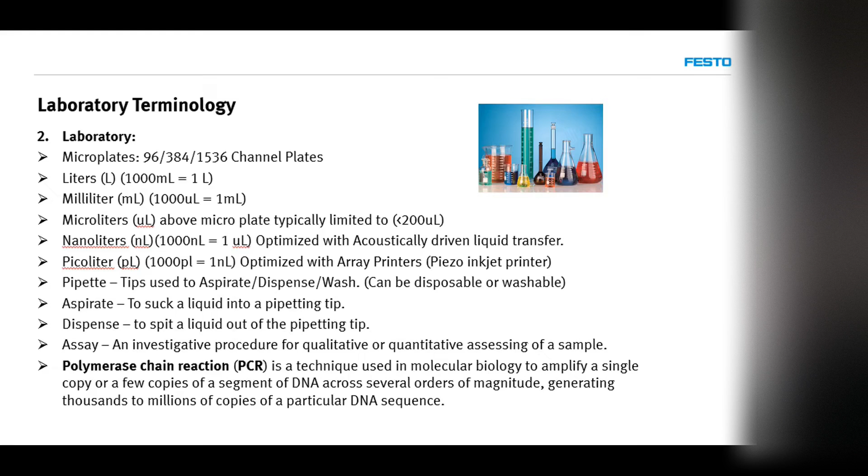The microtiter plates come in a variety of different well capacities, but again the 96, the 384, and the 1536 are most common, and probably the 96 is the most common. So this is what you would see if we're talking about microtiter plates.

Some of the different markets that support the mechanical support and liquid handling support in the laboratory markets: various assays, cell biology, cell culture, clinical diagnostics, down to micro plate dispensing, handlers, readers, sealers, transfer, wash. So there's a lot to do with various mechanical portions for supporting this industry as well.

So if I talk about Festo's methods for fluid handling and their concept and architecture - Festo has a lot of different pumping methods.

There are various pump methods. Festo does a pressure over liquid based method for dispensing, and we have what we call a PGVA. It's a pressure vacuum system. Basically, inside of this unit is an onboard compressor.

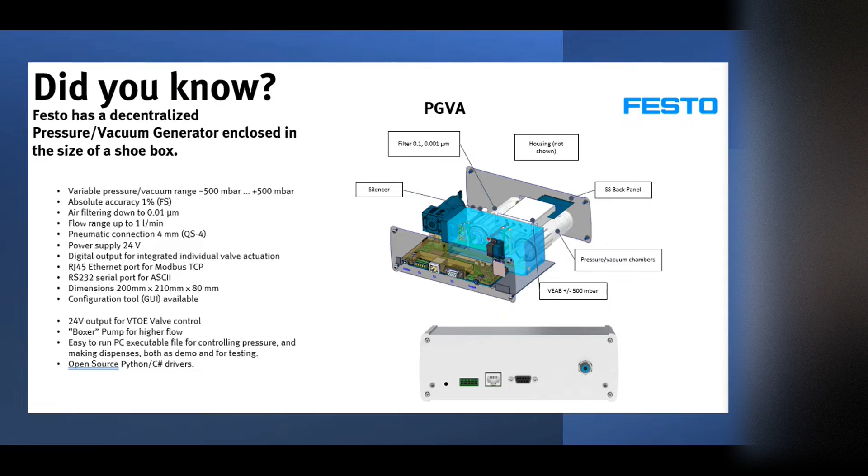The software has a GUI to function this unit. I'm going to turn this over to Eldon to do a little demo of this pressure vacuum system, and then we'll talk a little more about the architecture of that as well.

We can see it. It's up, it looks like it's up, Eldon. Good. Okay, so I'll just kind of overview the GUI here.

I am actually connected to a PGVA currently. I can disconnect - I'm connected through a serial port, but you can also connect through an Ethernet port. Once you're connected, you can change the default IP address, which can be helpful.

So what you set here is the desired vacuum and pressure inside of the internal chambers, and you can set them up to 1 bar. This is in millibar, but usually 600 is plenty for the application.

In the output pressure, this is where you'll actually set what pressure you're going to send to the valve. We can put it at minus 300. I don't know if you guys can hear it in the background actually changing.

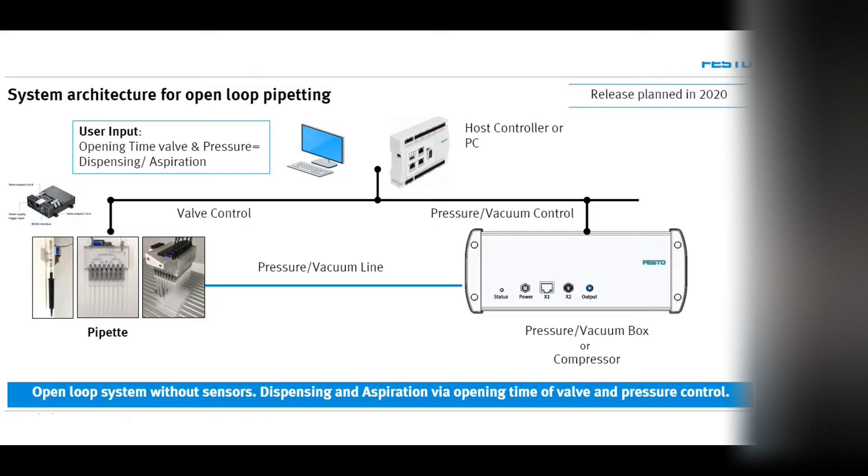So this vacuum unit will give you the ability to aspirate and dispense with a variety of different options for valve technology.

What that pressure vacuum system really does for you as well, if you're building this into your platform, it gives you a pneumatic source. If a customer doesn't have a pneumatic wall source, it really gives you onboard pneumatics to function the control.

This again kind of gives you a little idea that the pressure vacuum system can be utilized also in a bulk dispense. So basically, this has the air compressor, the pressure controller, and the vacuum all embedded into the unit. Here we're pressurizing a liquid reservoir, and then we're turning a valve on.

So the way we're getting our dispense rates and accuracies and repeatabilities is by the pressure control, the on-off time of the valve, nozzle size, orifice sizing, and then if you needed to do accurate testing, you would do that through a scale or balance table.

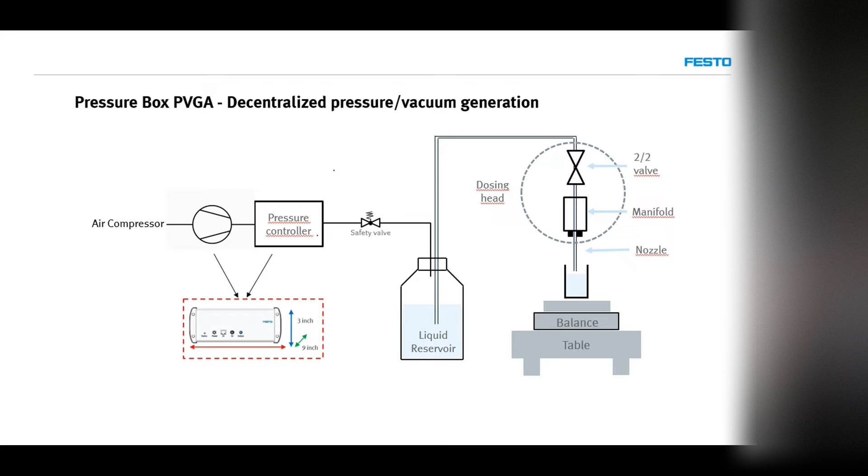We'll talk a little bit about valve control. We have a valve controller that can be integrated into this system, and it's a very high precision unit with very high resolution, 0.2 milliseconds, so very fast. This unit can be used for any type of valve and is capable of functioning up to 8 valves. It's about the size of a pack of cigarettes, and it also has a GUI instruction, which is quite intuitive and works quite well with valve control.

If you're really looking for higher precision, higher accuracy, and higher repeatability, you would potentially add one of these units in. I'll turn this over to Eldon to share the GUI instruction. What's neat about this is you can independently manipulate each channel.

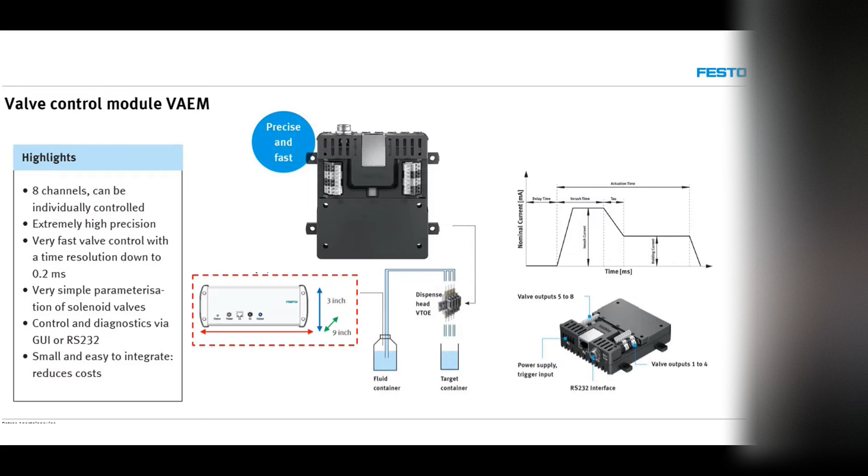Here is our VAEM GUI, and I'm currently connected through the Ethernet port. I'll disconnect to show you guys. So when you're disconnected, these tabs are all blocked out, and you won't be able to reach them until it's actually connected. When you go to the control tab, this is where you'll select the valves you have hooked up to the valve controller.

You can individualize these variables for each valve. I currently only have one valve on there. These parameters, actuation time, inrush, and tau, when they say times 0.2 milliseconds, that means whatever number you have is multiplied by 0.2 milliseconds. So this will actually open for 1 second. A little bit confusing, but once you use it, it's pretty straightforward.

Once you change the settings, it's good to always save it. Internal start mode means that we are going to actuate the valve from this GUI, instead of externally actuating it or manually triggering the valve from an output.

So if we watch, we may be able to see the output pressure drop. It's such a small valve, we probably won't, but yeah. So you can see when I actuate it, and you saw the pressure drop momentarily.

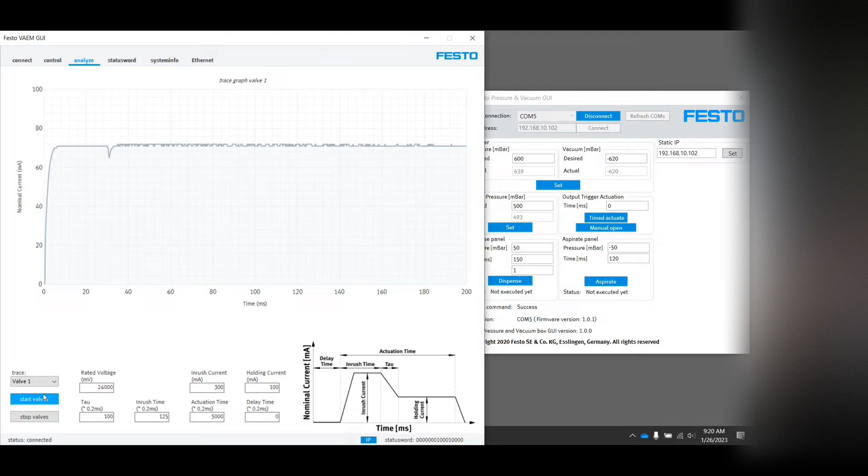Obviously, we're only running valve 1. Your status word tab is basically your error bits. This is just used to look at the status of the valve, and if there is an error, to see which error it is.

System info is just a general overview of the VAEM, the part number. Ethernet is where you will change the IP address if you want to. When you change the IP address, you have to hit set IP address, and then you have to power cycle the unit. That is key to resetting the IP address. If you don't power cycle it, it won't reset.

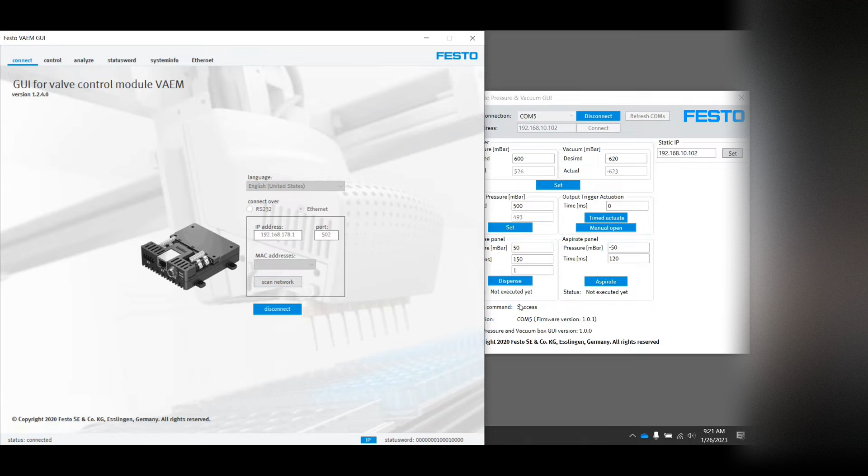And this GUI is also very straightforward and pretty user-friendly.

So can you go back to the dashboard again? A couple things that I wanted to mention. So on this dashboard, as I mentioned, each independent channel you can manipulate.

On the left-hand side, you'll see rated voltage, inrush current, and holding current, and you can manipulate that. The reason for this ability to manipulate is if you're really getting down to some really tight accuracies, like dispense rates down to the 1 microliter level, and you want a good dispense rate across all channels, all 8 channels. When you have a mechanical valve that you're actuating on and off, there might be some inconsistencies, because it's a mechanical device, and so you're able to manipulate that current to compensate.

So if you start doing some testing, valve 2 may function a bit different than valve 1, and you want to adjust that to have the same dispense rate. You can manipulate that current level to bring them all into the same dispense levels. The same with the right side, you'll see the inrush time or the actuation time, and you can manipulate that too. So it might take another couple milliseconds more to dispense the same rate on valve 2 as it does on valve 1. It's just playing around and manipulating, so it's really kind of a unique piece of software.

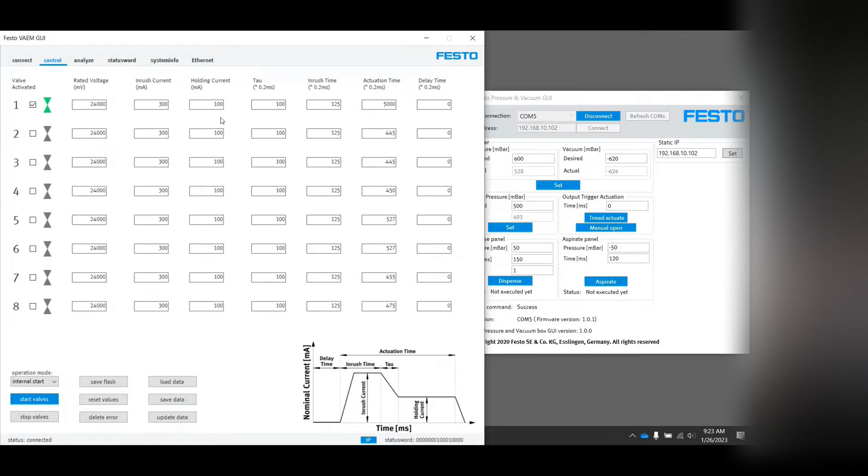Hopefully that gives you a little more of an idea of how this GUI instruction works.

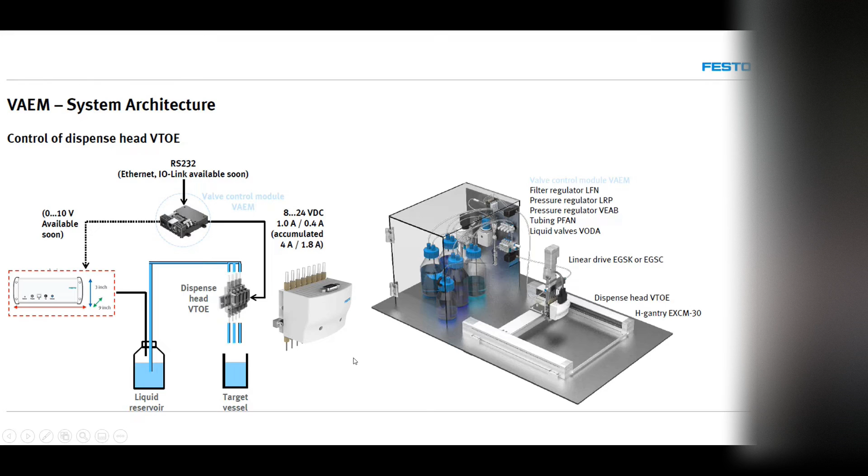I wanted to take a few minutes to go through some of the liquid handling solutions that Festo has, in terms of some of the components that we support for that process.

Festo has a number of different valves, and they can be configured into a number of different arrangements. Here you see a single channel, a 4-channel, and an integrated sub-D style 8-channel unit that's basically 9mm pitch for dispensing into a 96-channel microplate. So there's independent control of each valve, inlet and outlet, for dispensing those fluids.

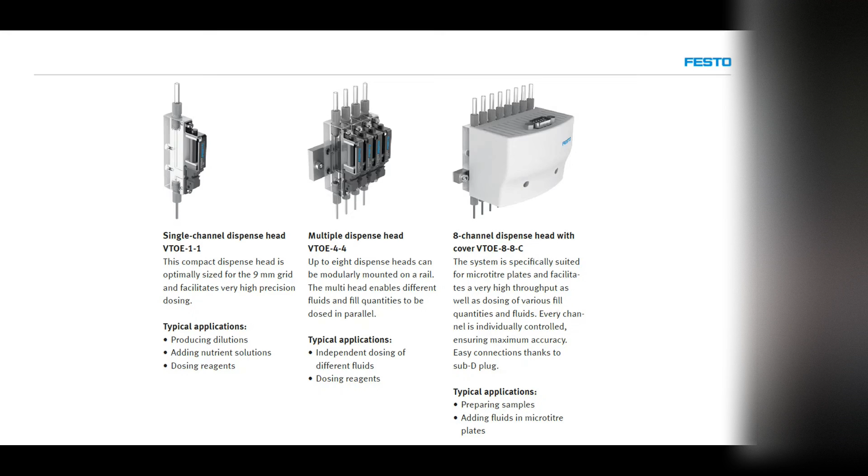We also have a product called our VTOE, which comes in a single valve design and a slice of 8 independent channels as well. So basically you're utilizing one valve to dispense 8 channels, and the layers in this Ultem manifold you see are precise channeling, so you're getting the same dispense rate across each channel.

You can sandwich these together in multiple configurations, up to even this 96-channel configuration where you're utilizing 12 valves to dispense into 96 channels.

We'll go into some more valves. We've released a VYKA, a VIKA, a VYKB, and a VYKC valve. I won't go into the weeds with all the technology of this - it's just to give you an idea of different valve sizes, different dispense rates, things of that nature. So the VYKA is a 7 millimeter valve that we released, and it probably services 85 to 90% of the applications.

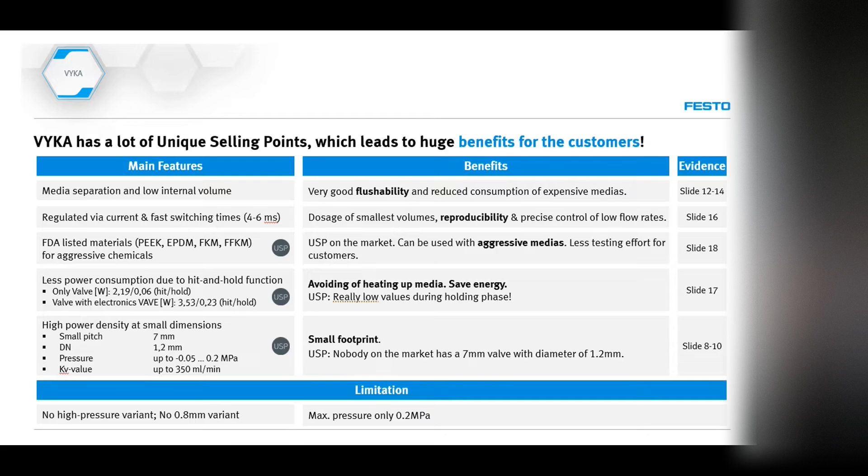It's a very good valve in terms of flushability because you basically have a rubber membrane, if you will, that's coming off seat, and you really have minimal nooks and crannies that harbor potential dead areas, dead space in the valves.

We've released a VYKB and a VZDB. The VZDB on the right is pneumatically controlled. We've had customers that may have an application that requires explosion proof, so we can certainly utilize a pneumatically operated valve as opposed to an electric solenoid.

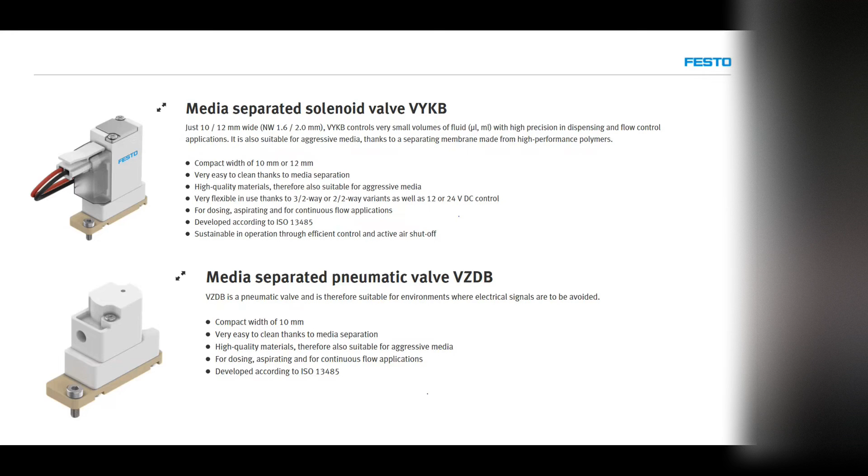And then the VYKC, which is a similar style valve as our smaller VYKA - a rocker style - but this is a larger valve, and it allows for higher dispense rates. It's probably not going to have the accuracies on the low end side of it, but it's going to be able to dispense higher volume liquids. Again, same principle, rocker style internal valve, with various options for seals and liquid materials.

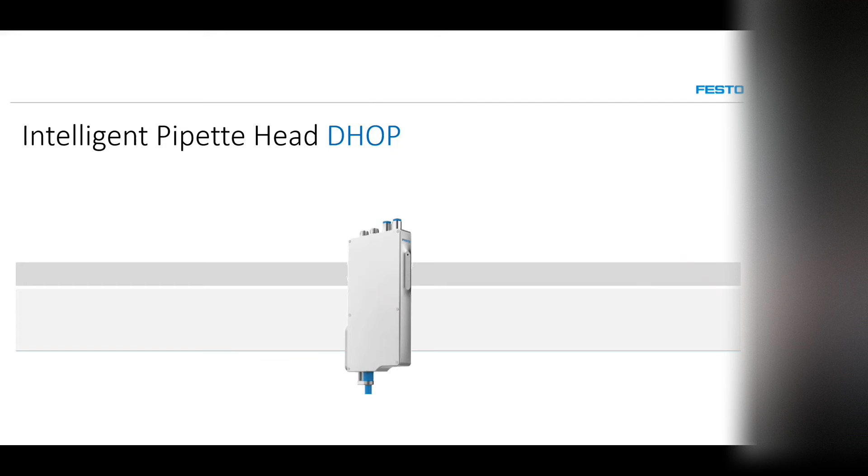Now I want to talk a little bit about Festo's new technology. I just got done explaining Festo's methodology for open loop. Basically in our open loop technology, we were using pressure over liquid - utilizing pressure and the on-off time of the valve, and it's kind of an algorithm that you develop based on what you want to dispense. So the intelligent pipette that is soon to be released here is our DHOP, and this has onboard smarts to it.

So you can actually function this unit. It's got internal piezo control. It also has a mechanical link here for ejecting the tips.

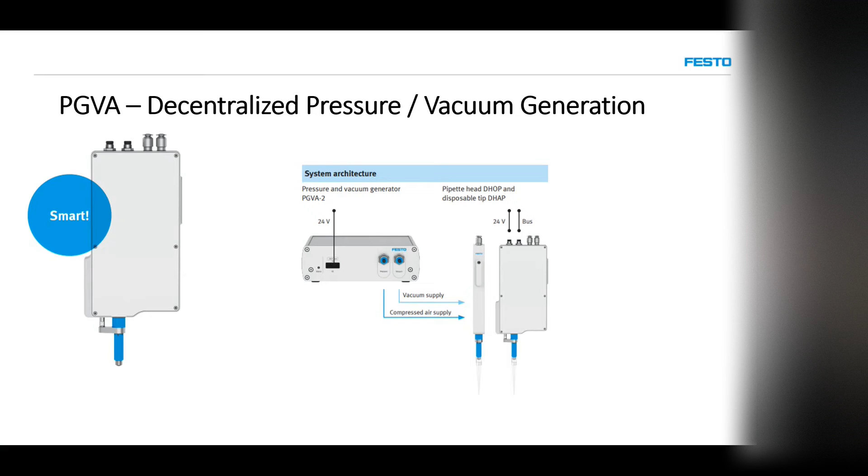It also has internal airlock pressure sensor, so you can actually plug in, for instance, if you wanted to aspirate and dispense 2 microliters, you can plug that in and it will aspirate 2 microliters and dispense 2 microliters. And it doesn't matter what the viscosity is. It takes that into account because there's an airlock sensor between the liquid and the internal sensor that measures that liquid volume that you're pulling in, and it's very accurate.

It has the tip sensing ability as well, and we can also integrate liquid level detection as well. So this unit will be very accurate, and it will have closed loop technology.

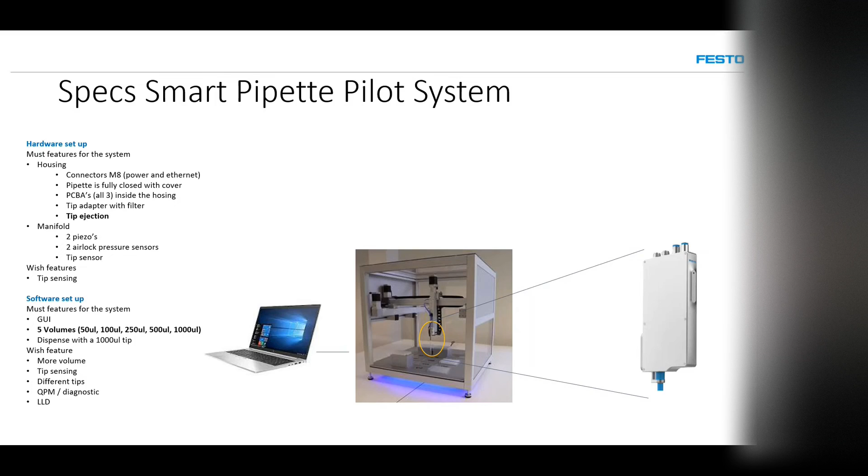You can stack this unit. It's 18 millimeter pitch to it, so you'd be able to utilize this for dispensing into a 96 channel plate, but you'd have to make 2 passes, right? It's just sandwiched into an 18 millimeter pitch.

Very low CV. So when we talk about CV, we talk about the repeatability of dispensing, and typically customers like to see under 5% CV. Here at 1,000 microliters, we're at 1% CV. And obviously that CV accuracy tends to drift up as the dispense rates come down, right? As you start getting towards that 1 microliter level, I think on this unit we go to 4%, which is still very, very good from an accuracy standpoint.

Yeah, just a few of the characteristics. So yeah, this unit is starting to be released. We are having pilot customers do some testing with this, so it's kind of an exciting product that I'm looking forward to in terms of closed loop feedback.

This is the simple architecture. You can basically function with a PLC right to the vacuum generator and plug in. The smarts will actually be built into right into the pipette unit itself, and then you'll have that closed loop connection back to the PLC.

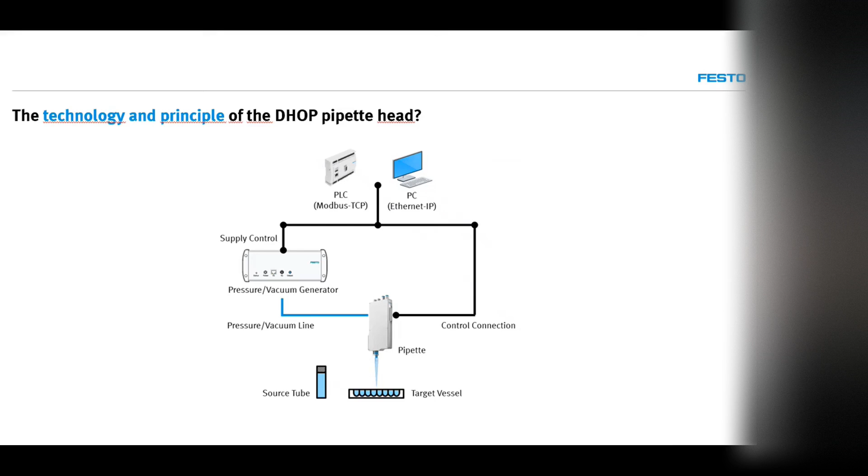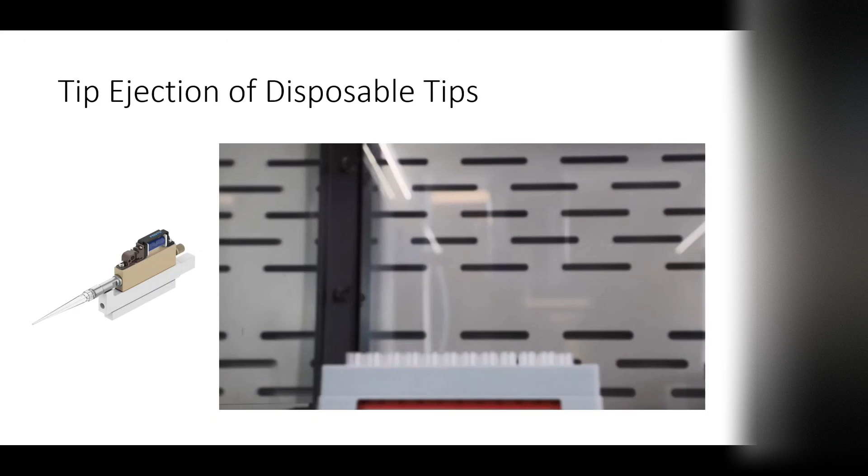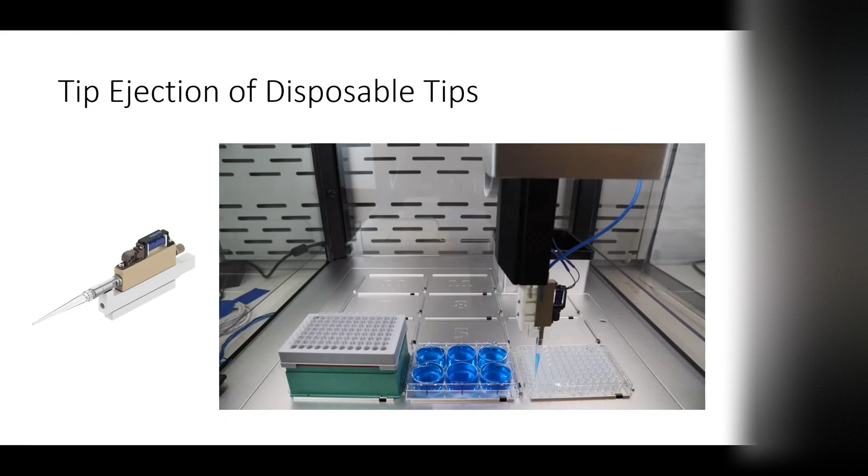So you can set the tip, you can do an aspiration, you can dispense into the microplate, and then obviously where you don't want cross contamination, you're ridding that tip by ejecting it and then going back to set another tip as well.

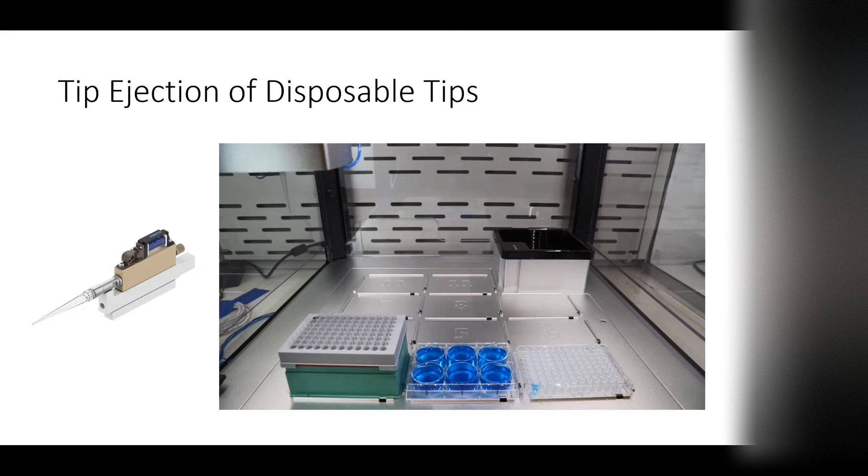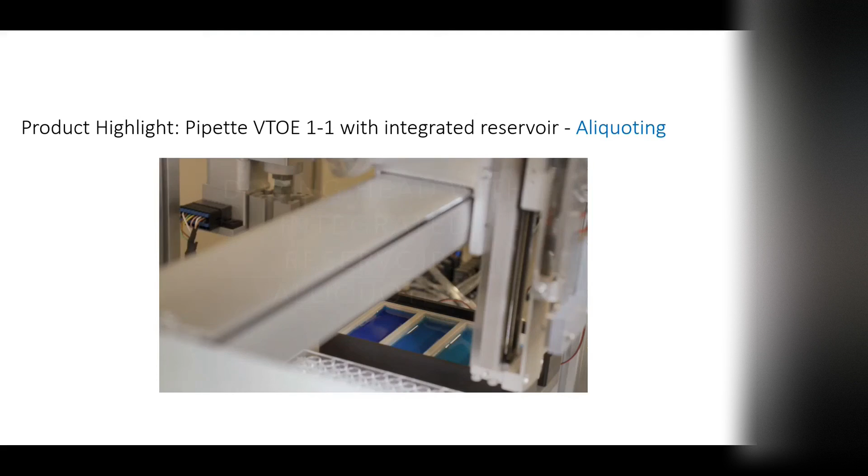So the next video, sorry, I kind of cut that short, but this is a unique custom solution that we came up with. Basically, it's a valve on a manifold, and we created a reservoir internally into that manifold. So customers that either are doing bulk dispensing or they want another method of aspirating into a reservoir and then dispensing small amount or various amounts, small amounts of liquids out, they can do that.

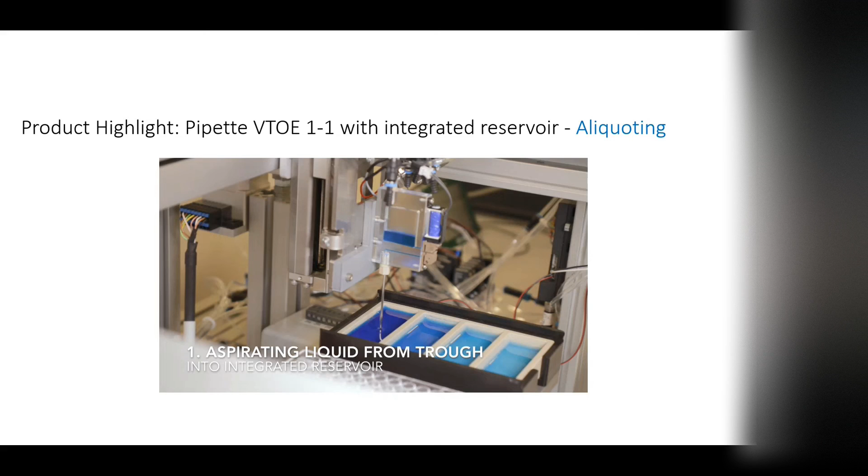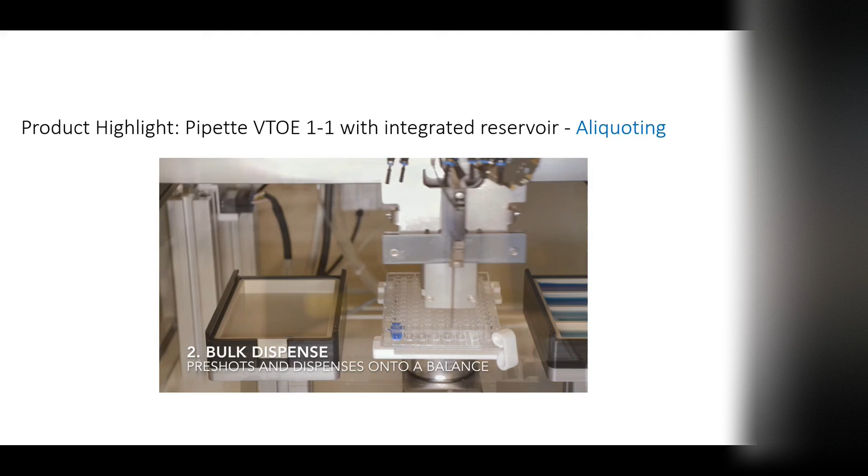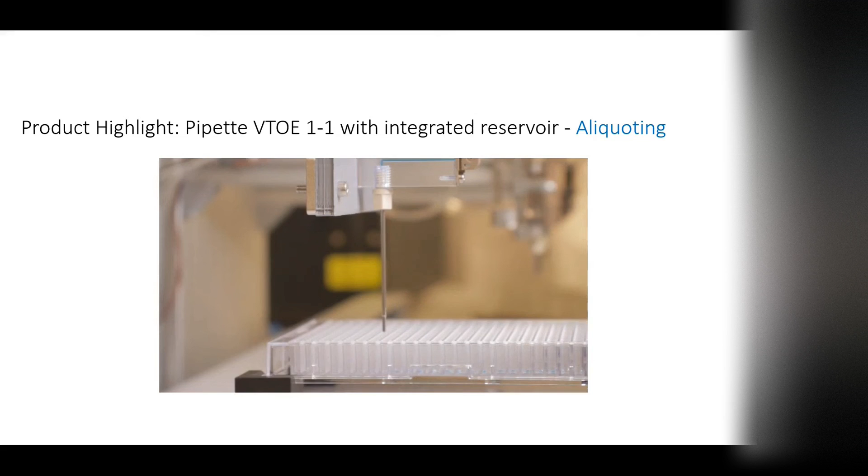So this kind of gives you a little video of aspirating those liquids in, and they go through the valve and then into the reservoir, and then obviously you can go and index your dispensing into micro titer plates. This dispensing here now is actually dispensing 1 microliter, so 1/50th of a drop of water, if you will, very accurately. So you can see that dispensing and indexing and dispensing into that 96 channel microplate.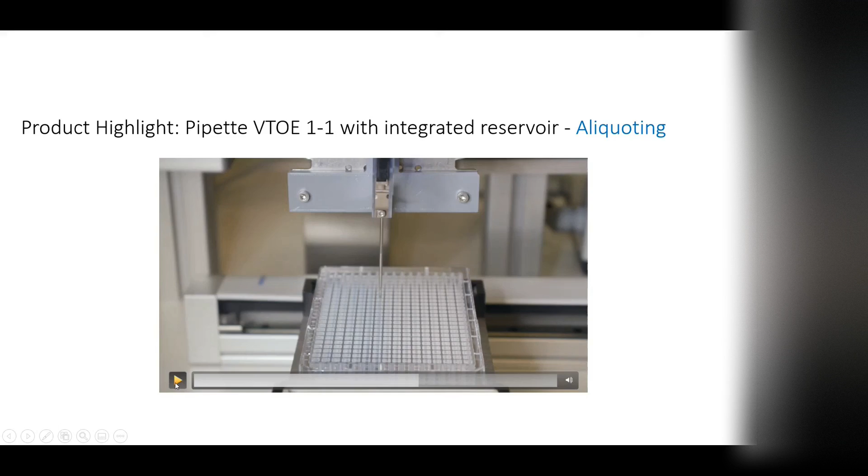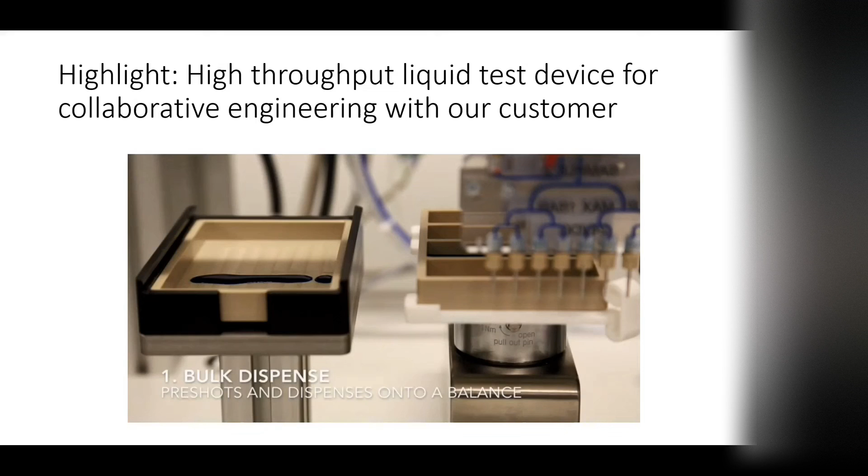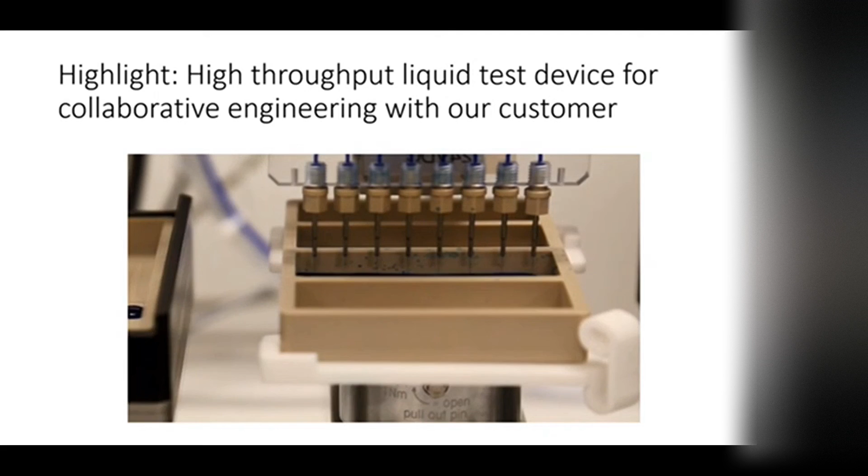This next video is an 8 station, eight channel distributor, and get that started here. This unit is basically a single valve 8 channel unit. So you'll see, you'll hear the valves clicking on and off. And then we're just indexing.

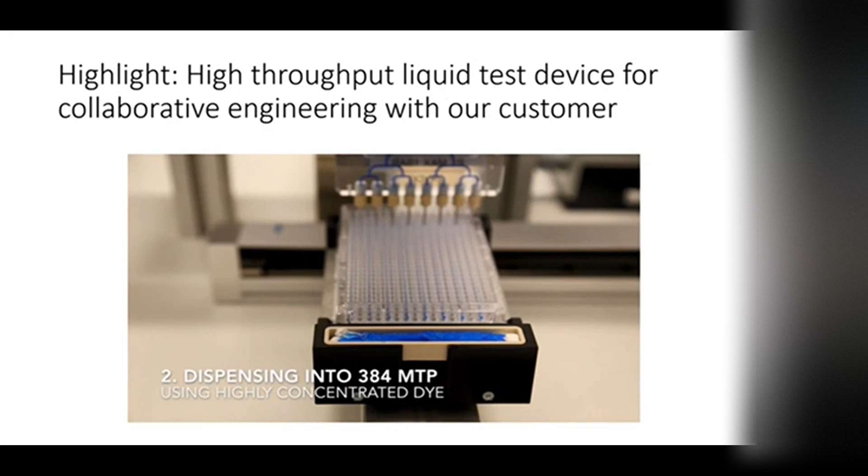This is a 384 microplate, titer plate. And when we talk about 384, 96, 1536, it's the number of channels that are actually in the same footprint, if you will.

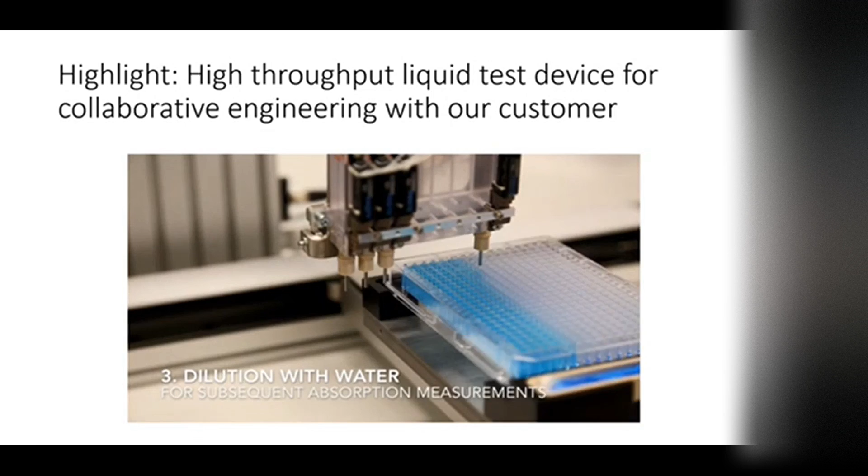This unit, back up here again. So we had an application that came up in Europe, and it was a very high throughput application.

The customer had a 1536 micro titer plate. There are 1536 wells in this micro plate, in the same footprint that a 96-well plate has.

They came to us wanting very high throughput, and we were able to dispense using an 8 channel dispense unit in 15 seconds. It sounds like a machine gun when it goes, but it takes into account coming down each row and dispensing 1 microliter into each of the 1536 wells, turning the corner and coming back down the next row. This is a 4-pass unit, but it performs the entire process in 15 seconds.

So yeah, that was an application that came up in Europe that we worked on.

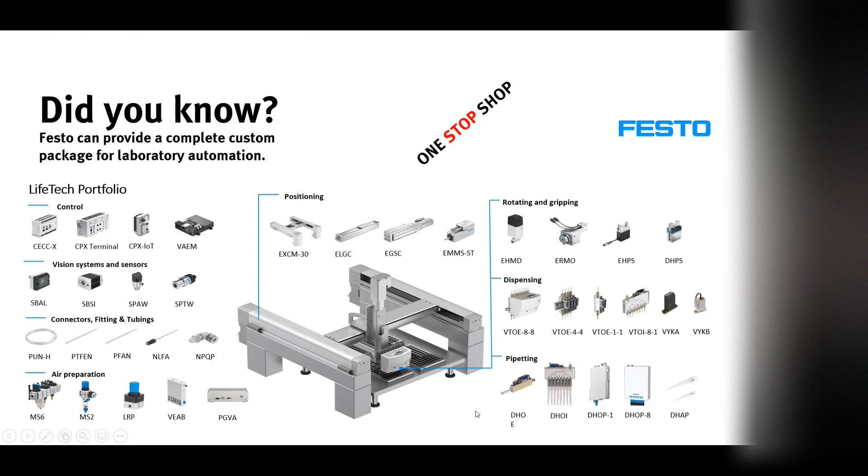So with that being said, I want to show this video. This is a typical system. We have a new product called the EXCM, a low-cost gantry system that's configurable in various stroke lengths in the X and Y, and you can integrate two Z-axes on the same system.

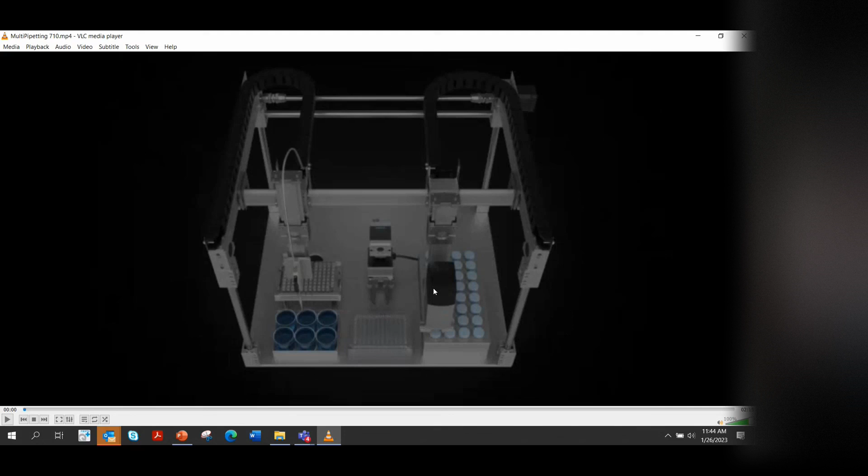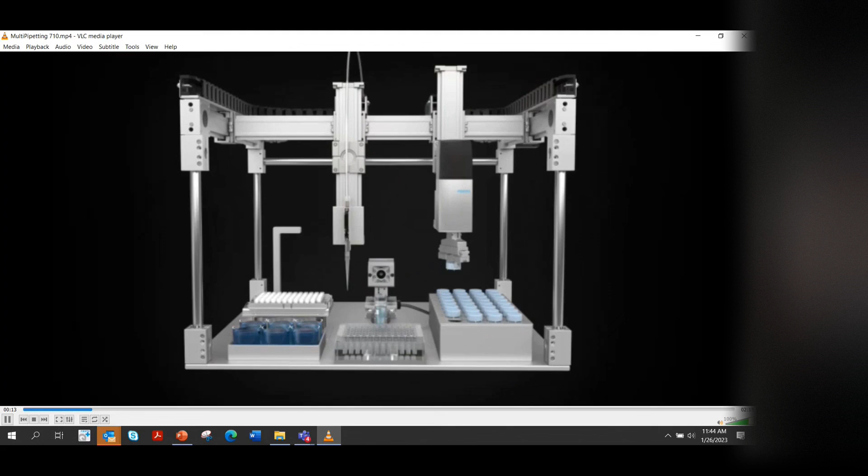On the right-hand side, we have a capper decapper. I'll start playing the video and narrate it. You'll see the capper decapper grip and pick up the vial, turn it to do a barcode read, with the camera in the back. It decaps the unit, we aspirate out of that vial, then dispense into a 96 channel microplate, dispose of the tip, and set a new tip to start the process all over again.

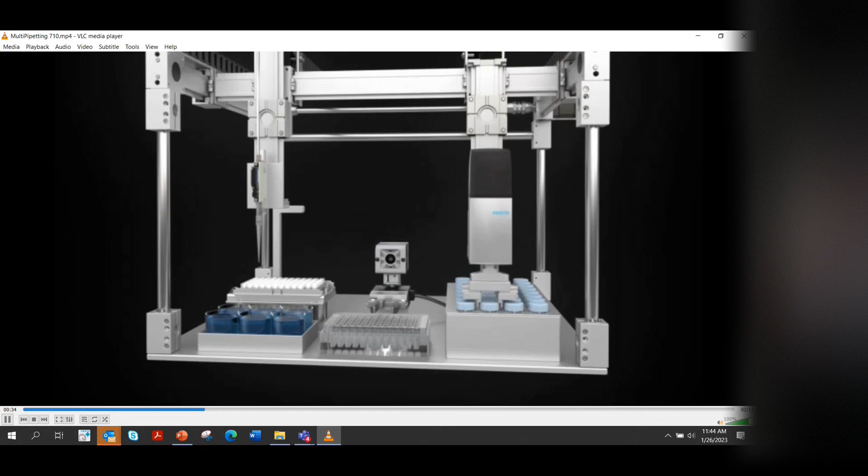So it's kind of a nice, as I mentioned, one-stop shop. Here you'll see the capper decapper bring the vial in, another gripper grips it, and we do the barcode read, then we're aspirating and dispensing into that micro titer plate.

Here we'll get a little bit of a close up on the dispense process as well.

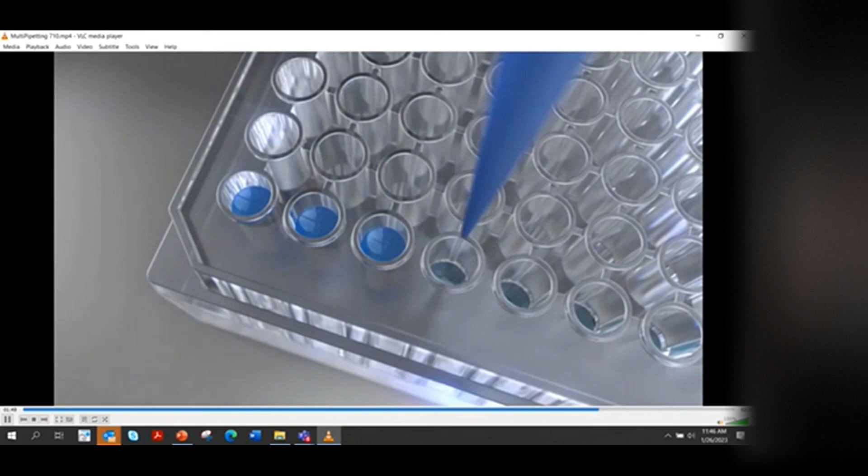That's it in a nutshell.